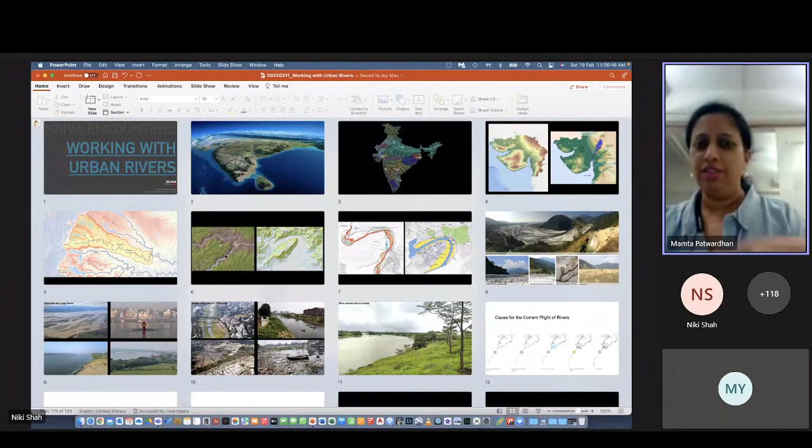Good morning, guys, I think you already know me now. Brief introduction, I'm Niki. What I'm going to do is talk about our experience working with rivers in the city areas primarily. So that's why my title is Working with Urban Rivers.

I'll go through a series of subjects we encounter and how we tackle them. So it's a presentation not for a particular project, it's taking examples from various actual projects, some built, some underway, to think and talk about what goes into such work. What goes into it as a planner, as an urban designer, as a landscape architect, what we are supposed to do for such interventions. So let me start.

This is something which I love. I just want to share this picture, it's now easily doable through various software. This is India, and as you can see, India has many hills and mountains throughout the country. Why this particular slide? The rivers originate from the mountains primarily, and this series of networks of hills and the undulation on the contours results in an extensive network of large and small rivers throughout the country.

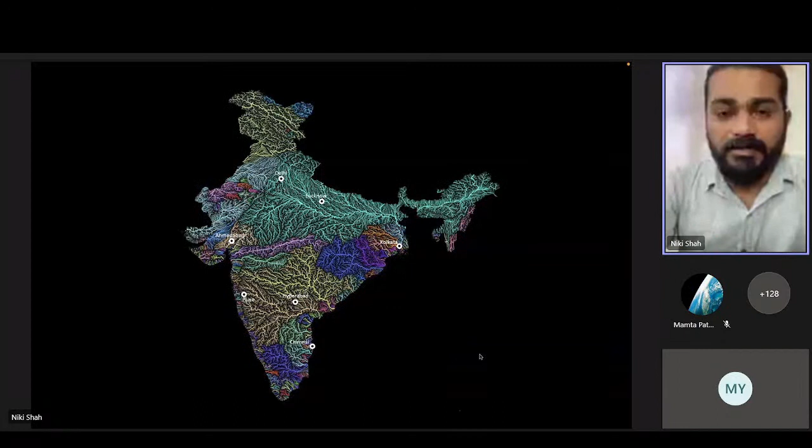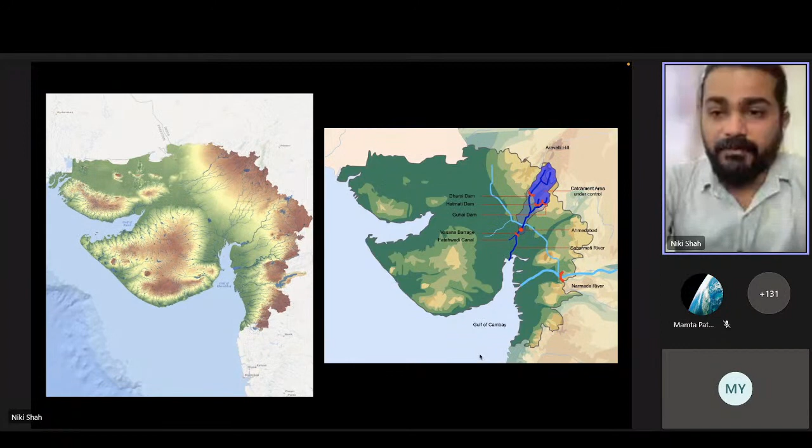When you work on a particular subject, I think from the larger context to the smallest context there has to be some understanding. So when we think about any particular subject, or in this case a river, we go and understand and study what the topography is, how the river is functional, where it originates, where it merges with the sea, and what other factors and features of the river ultimately cater to the overall existence of the river in a particular area, town, or region.

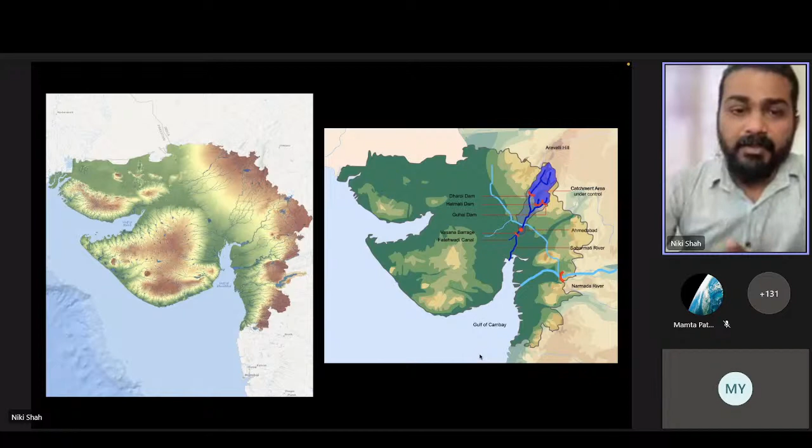So the study of extensive topography and the natural setup is the utmost and the first most important element, an aspect which is important for us to get in our understanding.

We also go and check the historical pattern of the river. On the right side, this is actually adjacent to India, it's not India, it's Bhutan. It's a river originating from the mountains, the Himalayas, starting as a very hilly mountain river, and goes through a plateau to the Brahmaputra. It has its own unique features and a continuously shifting river course in this particular area.

So dealing with this magnitude of water and the river pattern is absolutely important, that we make sure we don't neglect that for anything we want to do further. Also, if you see this, because of this sharp turn, there's a lot of erosion happening in the region. This is also one of the matters which needs to be dealt with.

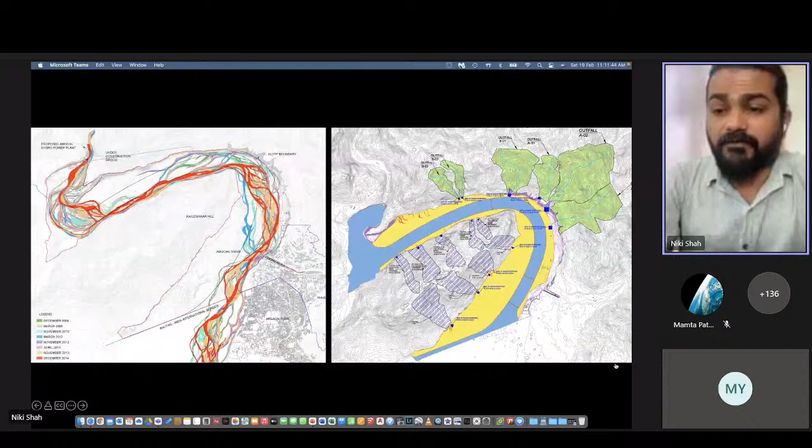So this is the kind of quick context of what it looks like. In the Indian context, there are large and important rivers like Ganga, Narmada, Brahmaputra, and these exist and are part of our lives for many reasons - a source of water, a holy river, holiness of the river water, religious activities, ghats - all of them are important and strategically located along the large scale river.

But there are rivers in the country which are pristine. They go through beautiful landscapes, hills and forest areas, and relatively they are untouched. But as you can see in the horizon, the town is extending, so there might be a threat to such rivers.

So when we think about any such interventions on a large scale, of course there are issues and problems we need to solve, but there are preemptive measures one has to take to make sure we don't damage the river the way we have done in the past. So these are the pre-thoughts of any such work we encounter.

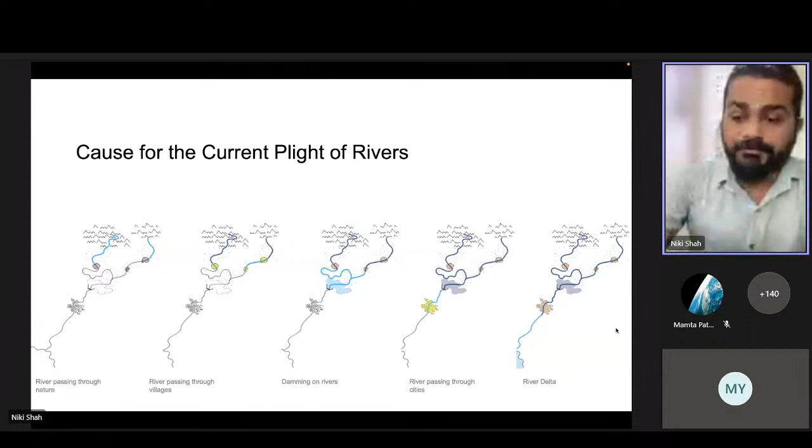Planning and design interventions in relation with rivers provide a unique confluence of urbanization and ecology that demands specific responses to the context. Riverfront or river rejuvenation interventions are ideal examples to understand ecologically sensitive urban design.

I'm going to restrict myself to talking about the river and city context. I'm not going to talk about rivers in forest areas because that has a different way of looking at it. So my examples revolve around cities and rivers - that's why it's an urban river context. Please keep that in mind.

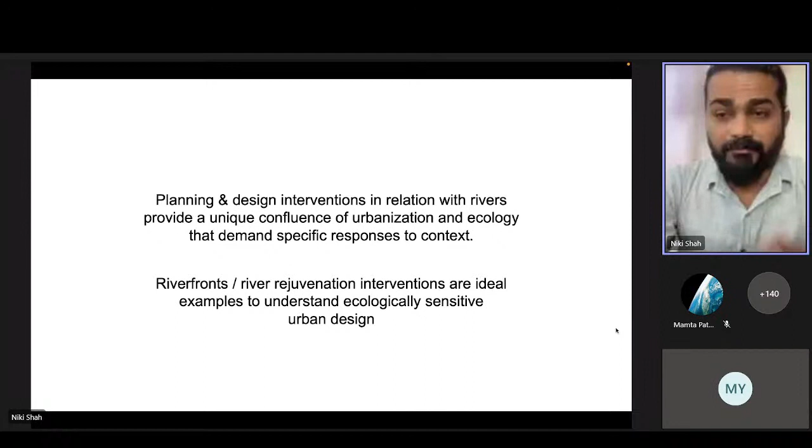So as an urbanist, it is important to understand various complexities involved in dealing with such interventions and making sure to address each issue and problem categorically to achieve a holistic solution.

Usually in the Indian setup, we tend to solve immediate problems. We don't think about the larger issues. We don't think about trade-offs. We only worry about one part of the issue and try to solve it. But if the other points are not addressed, the larger goal of any protection or such intervention doesn't get fruitful.

So those things are important, that we think of it in totality. So yes, of course, when the rivers are in their original situation, it is pristine, going through the forest, and it's beautiful. At one point it's dammed, so it's protected also.

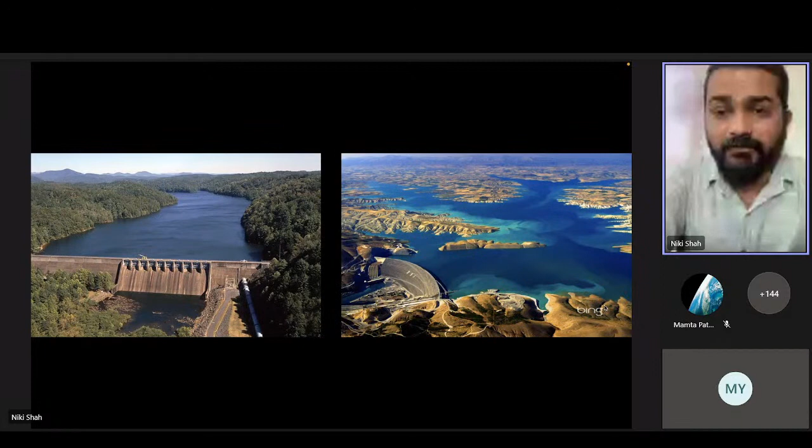But when it also passes through beautiful towns - this is not an Indian context, but is an example - there are many towns in India situated in mountain ranges, which have good quality water and river. Eventually, when it comes down to the industrial area or any such urban area, it tends to get polluted because we haven't solved the city problem and we tend to rely on the river to take care of our urbanization of the cities.

And eventually we pollute the river. And that's the condition of most smaller nalas to the rivers in the city. This is an example in Ahmedabad - this is 20 years ago, and that's the condition of the river at that time.

When we think about a river as a project, the quality of water and pollution is one issue. Urbanization is a second threat. There are people living on the river because that's easily available land, and it's a subject we need to tackle sensitively. Sometimes there are markets and other economic activity on the river, again because the land is free.

In the case of Ahmedabad, the river is not a perennial river, so it's dry most of the time. Only flood water or release water comes from the dam. So most of the year it was an empty riverbed, and that's why the land is easily accessible, and people have started using it for multiple purposes.

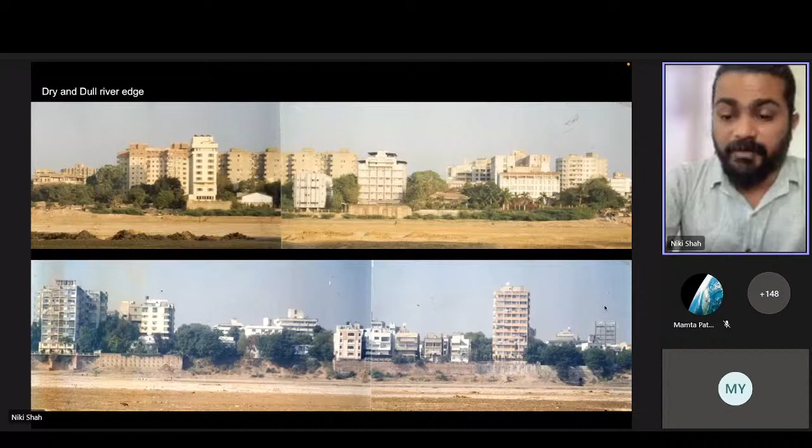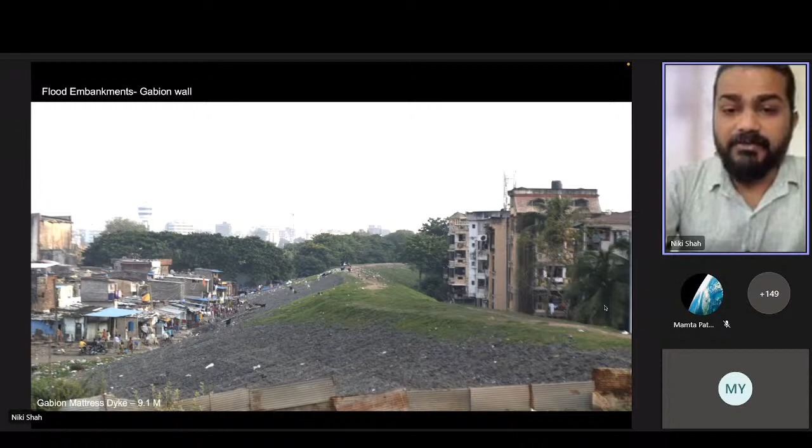Bits and pieces - sometimes cities have taken measures to protect the city from floods. Flood is a threat to many such rivers in cities. This is an example of Surat, Tapi, where the city has built dikes from stone, which protects the city, but it's not comprehensive. So the solution is not there yet.

The problem is not solved - it has a lot of pollution. Because of the pollution, there is eutrophication in the river, which is a nuisance. It creates problems in the river and many adverse effects as well.

There are rivers in the country which are living rivers - there are animals, crocodiles, fishes and everything. This is the case of Vadodara, where the crocodile habitat is flourishing in the river. So one has to also think about how to address safety and protect the living species in the river.

But in counter, it's a threat to human beings also, because the crocodiles tend to go into the city area during floods and actually harm people. So we need to understand how to think about both aspects.

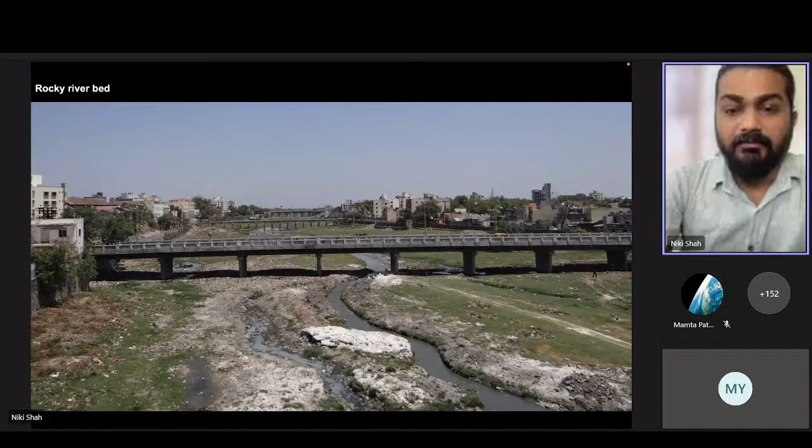Then there are absolutely dry and rocky riverbeds where water is really not there, in a drier region. So how do you manage that? How do you revive such rivers? I'm showing you examples and photos from the various cities we have worked with.

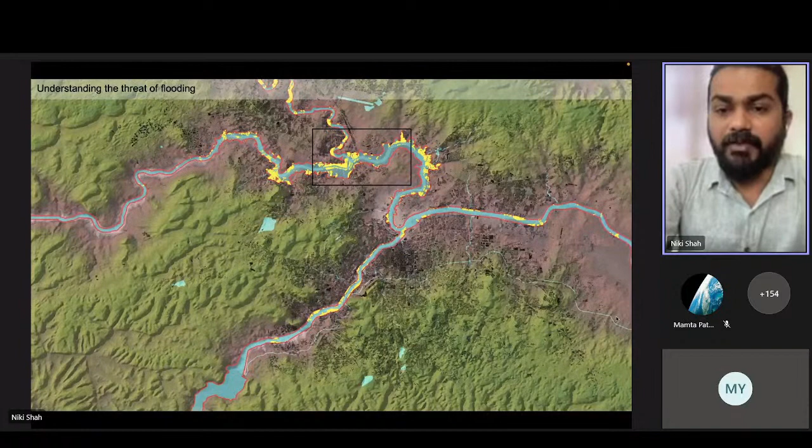There is a huge threat of flood in the monsoon flow. This is the case of Pune, Mula-Mutha River - if you know, I've been there. Most of the area next to the river gets submerged during the flood, and it's also an issue with poor urban design or city planning, and how you integrate all these issues together. In the case of Pune, urbanization has already taken place.

When the flood comes - these are the official irrigation department maps you can see - the flood actually damages or inundates the area around it. So how do you manage this also?

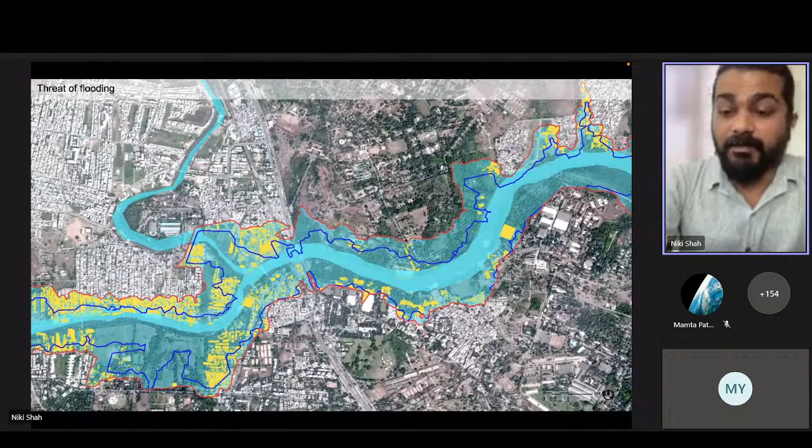These are the associated issues with urban rivers which need to be taken care of. Otherwise, we won't be able to revive the river, because we are always stuck with this particular subject: how do you protect the city from the flood?

In typical situations like this, although you might have done something, during flash floods or abrupt monsoons the city always gets flooded. In the case of Pune, Baroda, Tapi, and Ahmedabad, this was the every-year scenario, and the city has to face a lot of loss - sometimes lives, and damage to urban infrastructure. So how do you think about and manage this comprehensively?

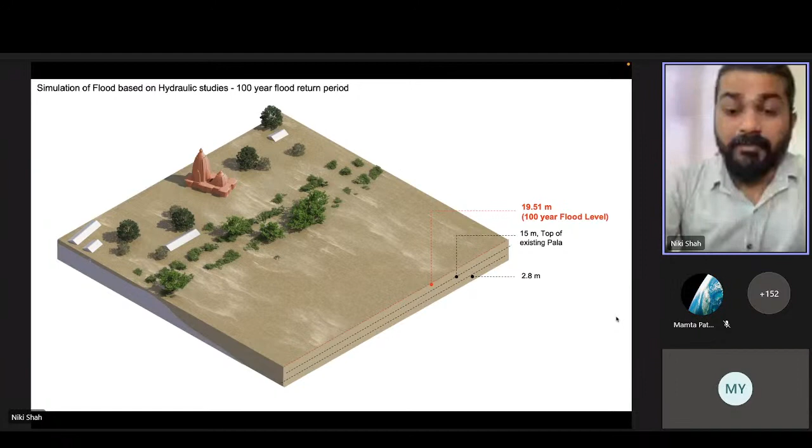And of course, there are rivers which are pristine - the landscape is beautiful. So how do you make sure future urbanization doesn't spoil this river, as we have faced in other projects and other cities? There has to be a plan to safeguard such areas from future urbanization.

Instead of corrective measures, I think it has to be a preemptive measure where we can protect the river and the river edges from the beginning, and plan the area or city in a way that it doesn't cause damage the way it does in the current context. That's something we have also addressed in some of the projects we have worked with.

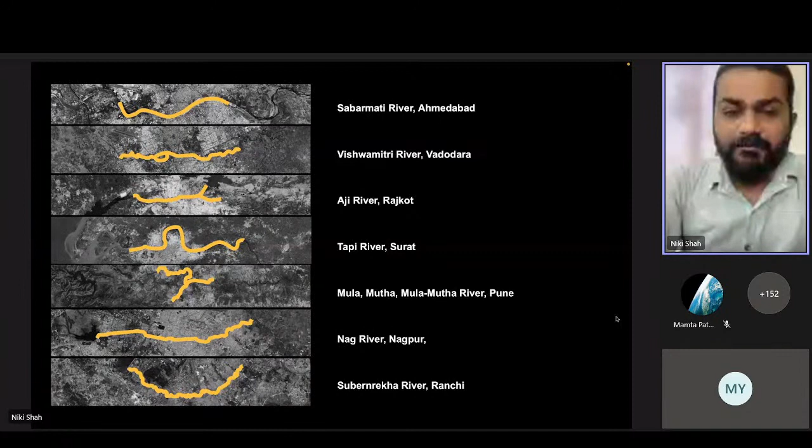So this is an example, or the experience from various cities and the rivers we have worked along. If you put together and try to summarize the key factors, these are the issues which every river faces in the city.

One big thing is pollution. A lot of sewerage water or industrial waste gets put into the river.

Risk of flooding. Most rivers have the flood issue because of heavy monsoon or the release of water from the dam, so the city gets flooded. So what do you do with that? Sometimes the water is scarce, depending on the region. So how do you manage and revive the river in a case of scarcity?

Sometimes the city does intervene in development to try to protect or work on the river edge or riverfront projects, but they're unplanned. They're not comprehensively planned. There are piecemeal developments which lead to further damage to the river, and negligence towards ecology and biodiversity due to urbanization.

A disjointed river edge ultimately creates a not-so-harmonious edge with the landscape, even in terms of public access. And it ultimately leads to inaccessibility to the river.

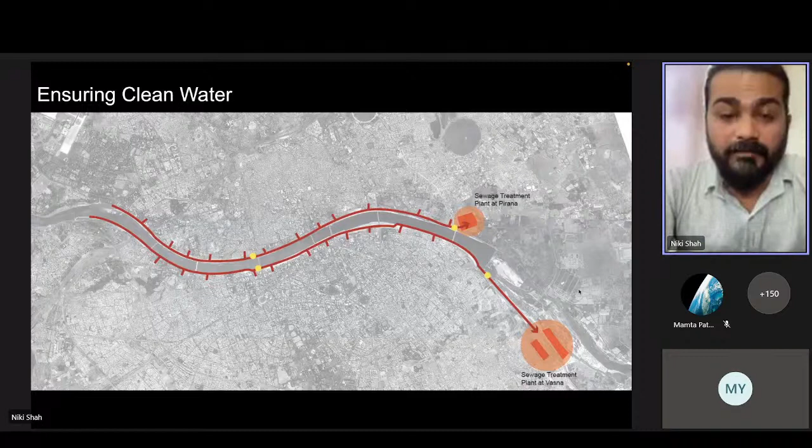We had to make sure that the polluted water, the sewage water, doesn't go into the river, and it diverts into a treatment plant instead. Eventually, the treatment plant water can even be used to refill the river. And after many years of work, the river has become relatively cleaner.

And it's a continuous process. So we are still working - the city is still working on and refining this process, making sure the river gets cleaner day by day.

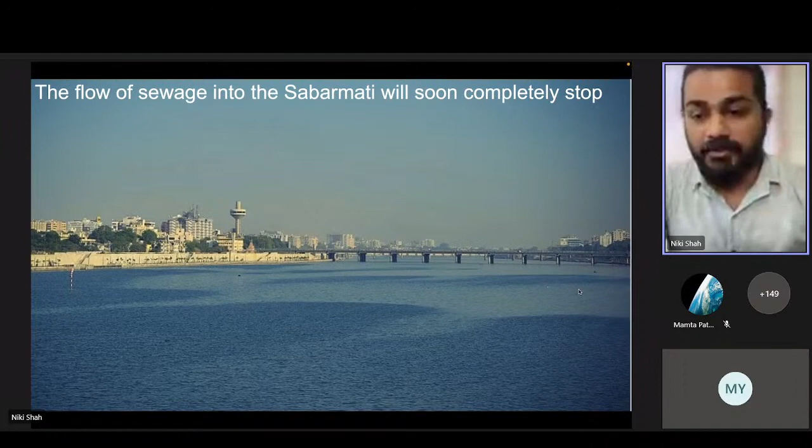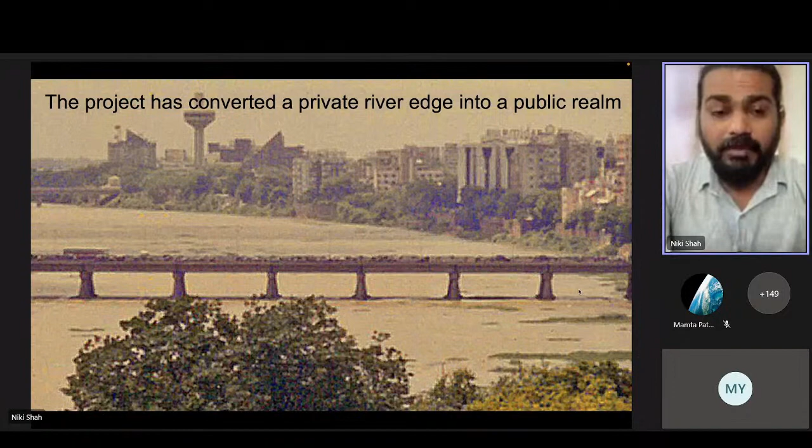The flood, which you see in this case in Ahmedabad, it goes all the way to the property and sometimes more. So it damages the infrastructure, damages the neighborhoods also. And eventually you want to protect them by some sort of embankment.

This is the solution worked for Ahmedabad, but in different projects and contexts, we have come up with a different, more sensitive approach to embankment designs. A flood will be protected by doing an embankment, which will also double as an accessible public space, so people can actually walk on it, not just an engineering solution. That's a quick understanding of how you do that. Eventually, it will protect the city from the flood.

Now this flood aspect is also highly technical. It's not just random calculations or random decisions. A lot of technical studies need to be done - hydrology, hydraulics. There are irrigation departments, there is a Central Water Commission who work and think about all of this and come up with the right solution for each river. So we have to go through those processes and technical studies before we come up and propose any such intervention.

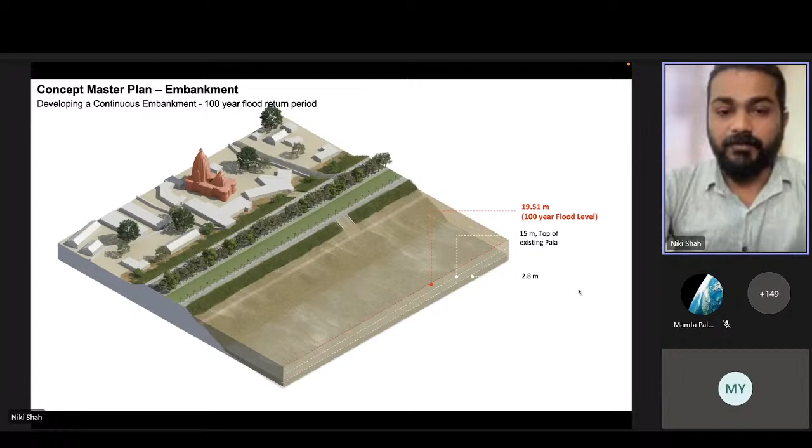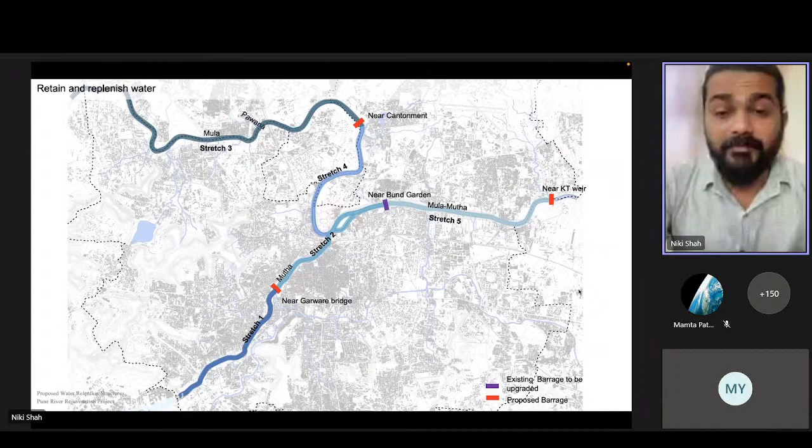Eventually, the idea is to revive the river and make it more of a front to public lives rather than a back of the city. It needs water, it has to be accessible. So treating the water, retaining the water, and eventually using the treated water becomes an absolute necessity - that's one of the solutions. It has to be accessible, and you need to plan it comprehensively so people can actually access these areas without creating crowds at one particular location, distributing it across the length of the river.

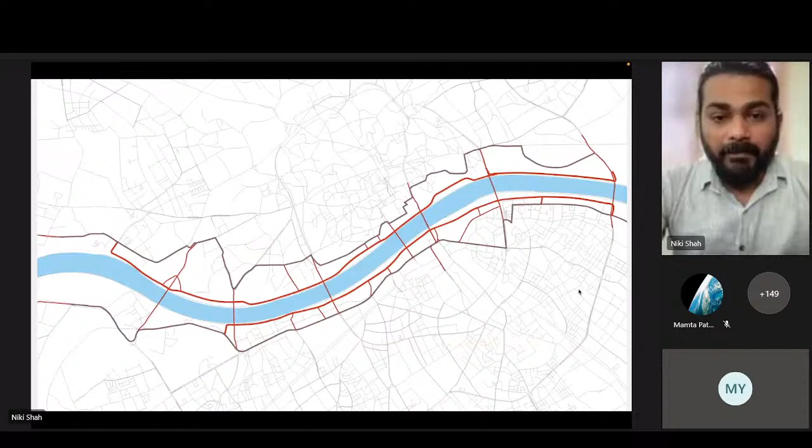So this is in the case of Ahmedabad. The river is accessible now. Earlier it was not.

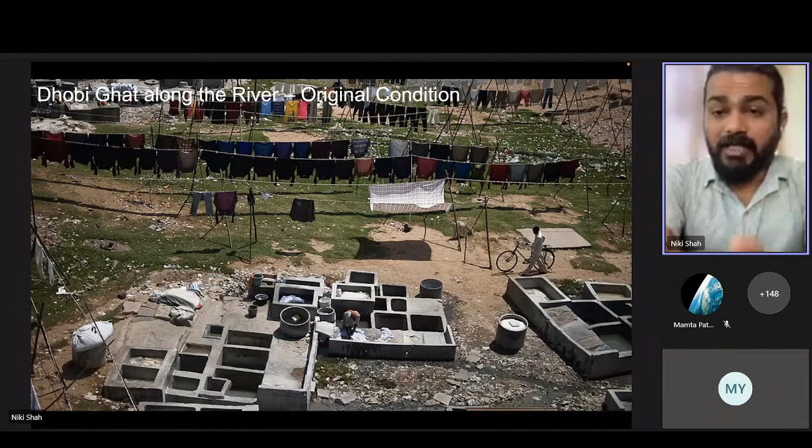We also need to make sure that any social or economic activity which happens on the river - and this is not organized, it has come up as the city has grown - as part of the project, we need to integrate these facilities and give them better conditions. There are two issues: we make sure we give them the right to use the space so we don't hamper their livelihoods, but because of this activity and the chemicals they use, they actually pollute the river. So it's a win-win situation - they get a good facility and the river is protected from the harmful chemicals used for such activity.

So in the Ahmedabad case, we actually designed a separate campus along the river called the Laundry Campus - a Dhobi Ghat - with all the modern facilities needed, accommodating all the people who used to work on the river banks. The water and everything ultimately goes into the treatment plant, not into the river. So from larger interventions to small bits and pieces solutions like this, together it helps the success of any such river rejuvenation project.

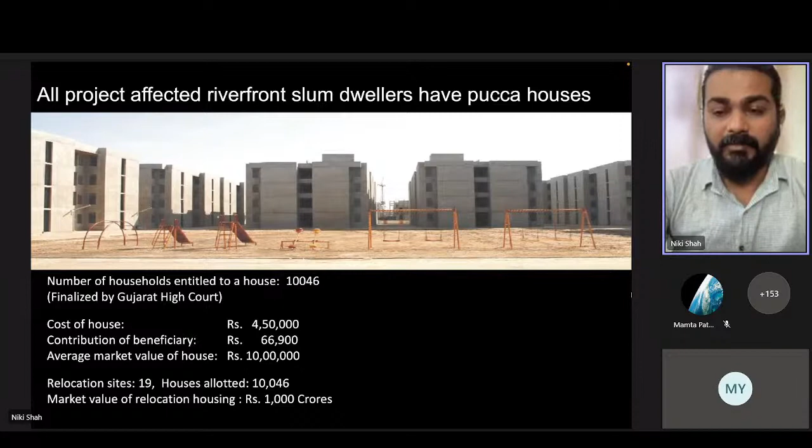Slums, yes, the slums are on the riverbank. There is no other land available, so they definitely use this space. But every year there is a flood and their houses get damaged, so it's also a concern for their safety. At one point, the city has to decide there has to be organized housing for them, not leaving them open-ended in such threatening areas. So in Ahmedabad's case, the housing was developed, and the market - any local economic activity - needed to be organized, so we've done that for Ahmedabad in this case.

So these are quick glimpses of how you tackle the varieties of subjects, and it depends on the city and the context. There are different types of issues and cases, but in a larger sense, the 7 points are the key factors which have always come across as something to work on.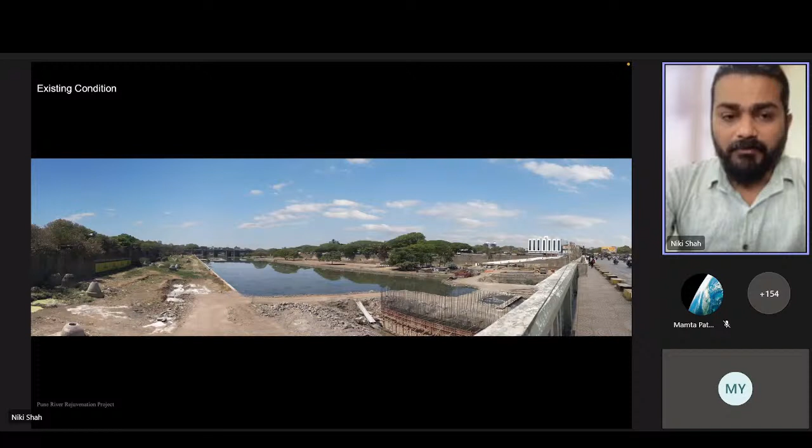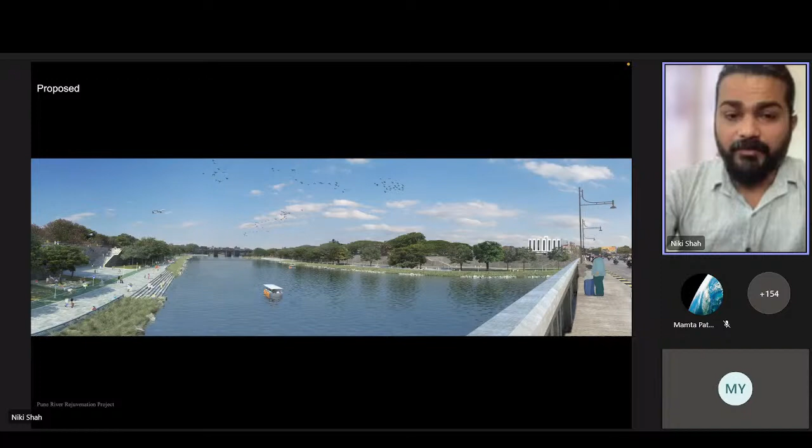So I'm going to talk further on this aspect. Sometimes in a situation like this - half-hearted development - the kind of solution we can give is shown here in the case of the Mula Mutha River, where the embankment strategy and landscape show how the water is going to be replenished eventually.

In situations like this, there are temples and ghats, and trunk lines already laid along the river. How do you make sure this situation is improved - the polluted water, the infrastructure lines, the temple getting access - and transform it into integrated development with ghats, putting the lines underground, and those kinds of things.

In a situation like this where the river is living, like with crocodiles, you can actually design the habitat within the river, which helps crocodiles flourish while also protecting the city and people so they don't face flood situations that harm them in the city area. So that kind of solution.

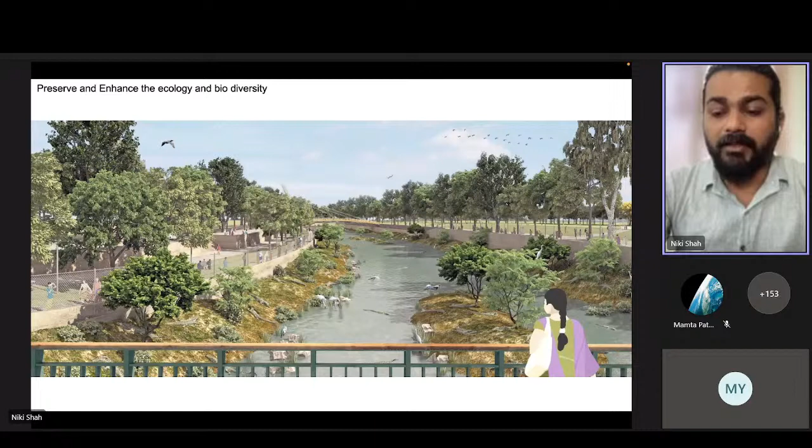Every time we work on something, there are unique characteristics to the particular river and context. Looking at that aspect, we need to accommodate and make sure we avoid a unilateral decision-making process for any such master plans or design.

After doing all of this, in situations where the river is already polluted, there are standard solutions which I've explained. But there are rivers like this that are pristine, green, and landscaped.

So how do you tackle such a case if this is part of the project, let's say there are 20 kilometers of river length, and only a small portion of the river edge is urbanized, the rest of the river is like this. But there is a plan to expand, the city is going to grow, and as you can see on the horizon, the city is already expanding along the river. So how do you make sure these rivers are protected as part of the overall plan, rather than doing the same process?

Let's get the problem first and then try to solve it. How can we integrate this riverfront project or river rejuvenation project as a larger city master plan? That's something I want to elaborate on further.

I'm quickly showing an example which we are recently working on in Pune. This is a river called Indrayani, around 20 kilometers long in total length.

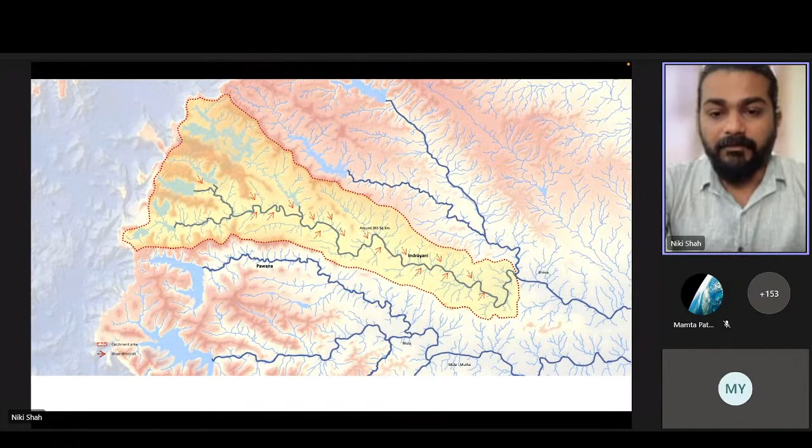This is a quick contextual picture. So there are flatlands and smaller hills around. There are also urbanized areas and large facilities, and campuses have come up along the river.

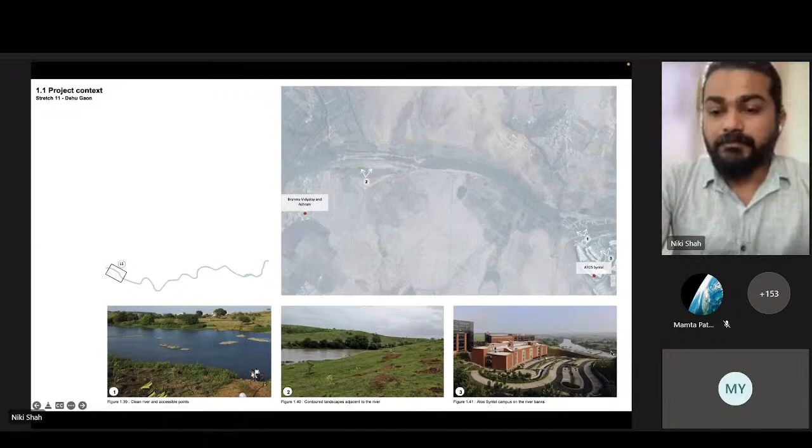There are temples, ghats, crematoriums. But you can see in the satellite image the city has not yet reached all the way to the river. You can see small settlements and urbanization, and here the societies have come up.

So when we look at the pattern of such urbanization, in the coming 5 years the entire region will be urbanized. As transportation lines and infrastructure get built, the city will expand, and we will have the same issue with the river that we see in other urban areas.

So our approach is to plan this river rejuvenation project in a way that protects the river from the beginning, with the city having a particular limit where it can expand without damaging the river edge.

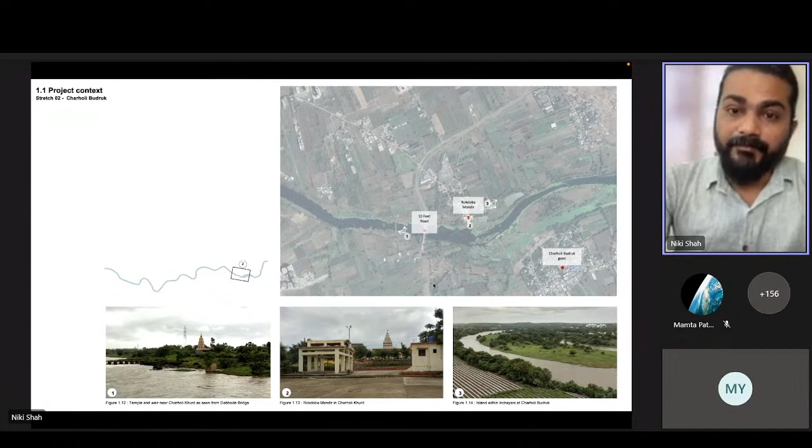There are different activities. There are important temples and ghats where a lot of tourists and devotees come every day and throughout the year, and these have a direct relation with the river water.

We also go and think about the different activities and the current pattern of development, and try to map them along the total length. Most of the area is open land, forested or agricultural land. There are smaller points, smaller interactive areas where the city has come all the way to the river, or some religious or industrial activities.

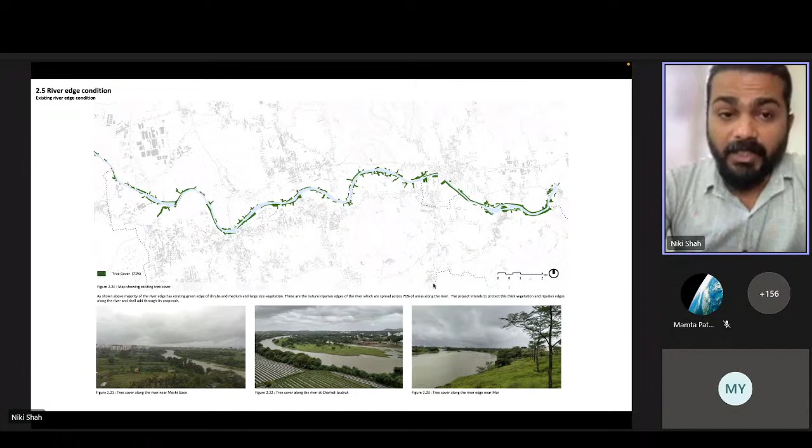Keeping this in mind, how do you approach such a river? We study extensively the current edge of the river in terms of vegetation and trees, so it's important to understand the local flora and fauna, which helps us decide how to actually make this edge more of a landscape edge.

We also study the immediate land use and current situation. As you can see, most of the edge is green, meaning it's agricultural land. But the city is already expanding towards that, so this agricultural land will diminish at one point, and the city will reach the river's edge.

We also study in detail the hydrology and hydraulics. Every river in our country has a map showing the inundated area, with high flood lines and frequent flood lines. As you can see, most of the river flows in the center, but most of the immediate areas are floodable, so how do you manage that?

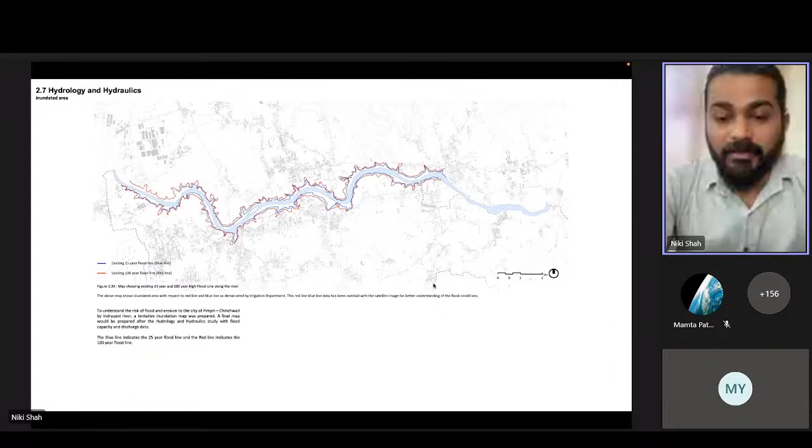And of course there are contrasts. As you can see, there is an active edge and a passive edge. So how do you make sure it protects the river and also brings it more into the daily lives of the people? There are limited points where people can actually access the river, but the rest of the time it is open land.

So the primary objective, keeping all other points in mind, is to make sure we protect the edge from further erosion. There is constant erosion of the land at the edges, so we need to make sure we protect the land.

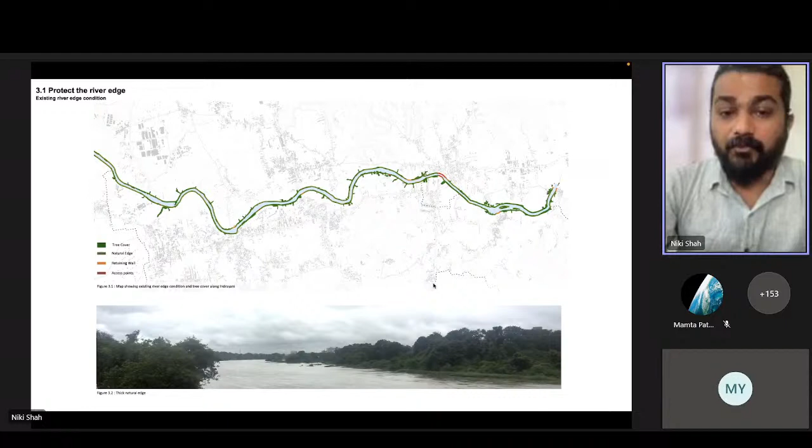In this case, we have tried to keep maximum, or 99%, as a natural edge, strengthening the edge to make sure it doesn't get damaged by future floods or frequent floods, and the vegetation everything grows. There is a limit for any city to grow, and there are various studies of the river edge and how the river is done.

There is land ownership to consider. Urban design and urban planning doesn't happen if you don't worry about who owns the land. We can intervene on public land, but we cannot do anything on private land. So it's absolutely important that we map all the land ownership along the river and understand the situation in the actual context versus the ownership point of view.

So these are the different factors we also tackle, even if the landscape project is there, but this is critical. In this case, you can see the red portions are the pinches where the river is actually quite narrow, where the maximum threats are.

So how do we make sure we also improve upon these aspects? Ultimately, we protect the river edge and have a laminar flow of the river, where based on the amount of water it's going to carry during the flood, there is enough width and depth available so the water can go and doesn't damage the rest of the area.

As you can see, our intervention is minimal in this case. We have tried to keep the lay of land and the contours similar, made it more strengthened, planted more, so it doesn't eventually damage the edge and can sustain a longer period of time, not getting damaged every year.

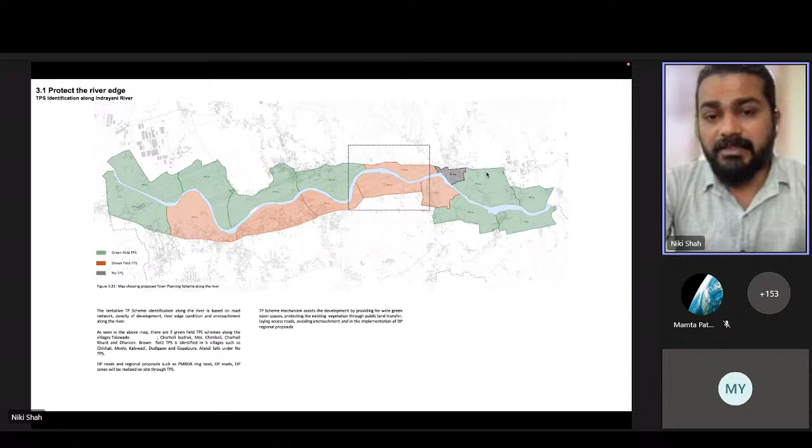So inundated areas are critical. How do you handle urbanization and future urban growth? These are the official maps of the city where you can see the city is already expanding all the way to the river. So eventually the planning angle comes into the picture apart from river rejuvenation—how do you plan the city in a way that you have enough land for the riverfront projects also.

As we go, it's a progressive protection plan or river rejuvenation plan where we protect the river. As the city expands, we try to expand and make sure we restrict the city to a certain level, and the embankment remains protected.

So here's a quick collage of the situation, this is what it looks like. The first intervention is to have a smaller weir in the river, replenish the water, retain the water, and give the edge as a protective measure through landscape.

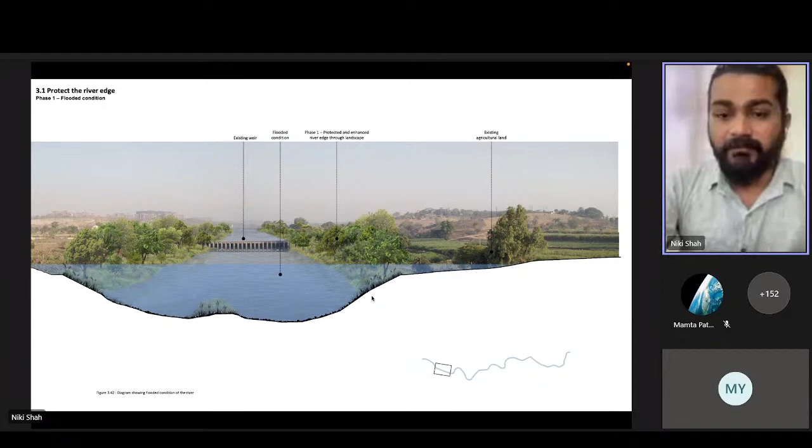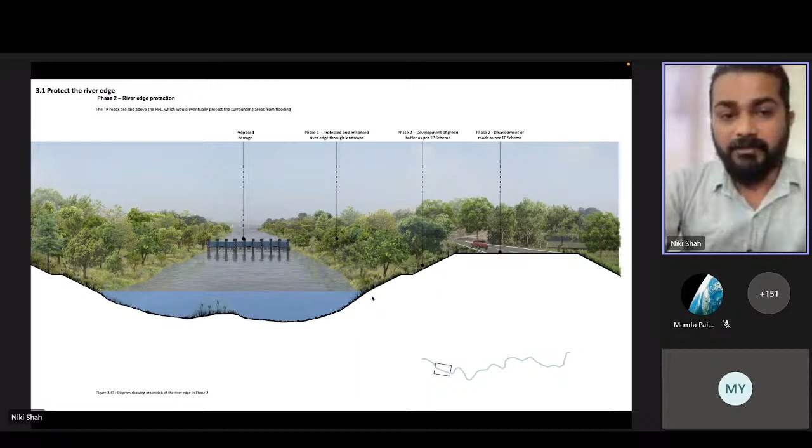In a flood situation, by the time the flood comes, it's still going to be flooded up to a certain level. Eventually, the city will have another level of embankments which protects it from the eventual flood. That's how this step-wise manner grows into the river project.

When we did the master plan for this area, this is a typical zone showing how the river is. The black line shows the land ownership, not the project boundary—that's river land. The rest is private.

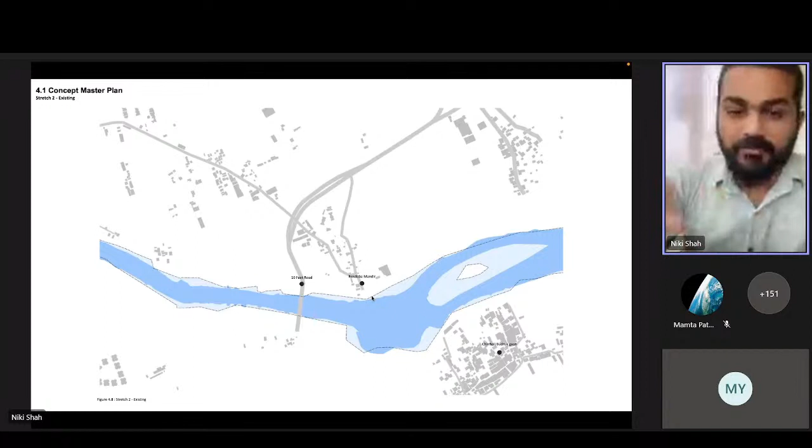We do the river edge and protection measures, creating the edges in a way that water flows smoothly rather than creating efflux or erosion, protecting the bank while keeping in mind all the existing activities like temples, ghats, access points, bridges, pedestrian bridges, and there is a plan for the future also.

This way, a couple of meters away from the river gets protected, and after that you have all the street networks and the future city—you can say TP schemes were planned locally. The plans were also designed keeping this in mind. So instead of solving the problem once it already exists, this is a preventive approach to safeguard this particular river.

And the city has accepted this proposal, that we will go in this fashion. So this whole buffer zone of the landscape or the river, the forested land between the river and the urban areas, is an important intervention.

So as you can see, a couple of other areas where the city is already flooded, and there are ghats and temples. How do you integrate that and keep the proposal for future expansions also?

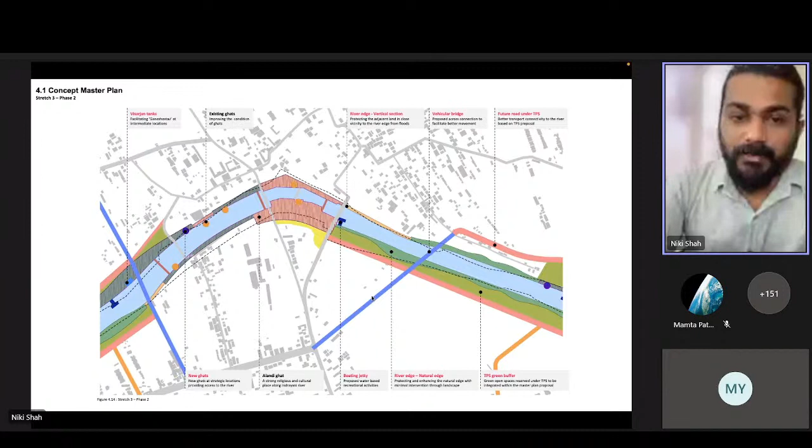So eventually we managed to put together a master plan, a landscape plan, which has lot of accessible edges and preserved edges. It's also an idea that not every time the river has to be accessible by people. It should be accessible, but not for daily life. It's not only always about recreational areas, parks and promenades. In this project we have tried to minimize that also.

The primary objective is to protect the edge. So there is forestation and protection. And then there are areas where people can actually go and walk and use this space also.

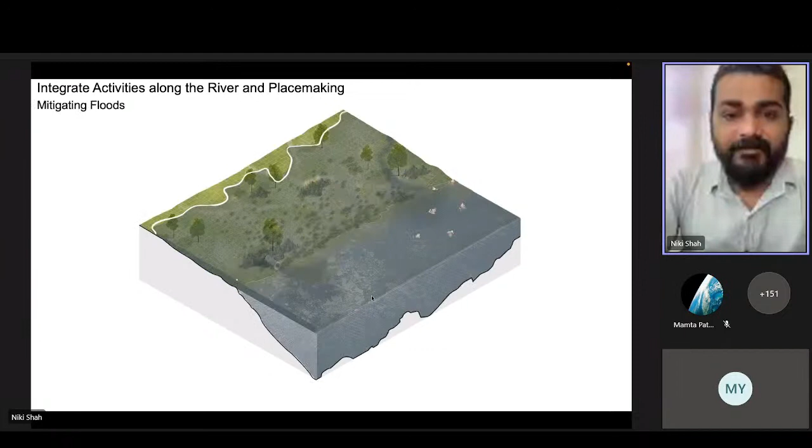So a quick diagrammatic summary. Typically, this is what the edge is: polluted water coming in, eroded banks, flood mitigation issues. These areas are always flooded, so how do you strengthen the edge and restrict the flood up to a certain limit?

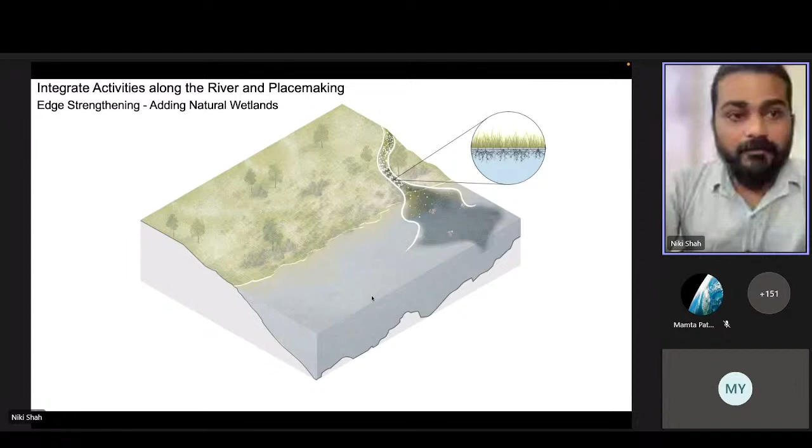There's a lot of sewerage and other things entering the river, which needs to be protected. Even in situations like this, there are so many inlets coming into the river bringing polluted water. These are actual examples of the location. So how do you integrate that as part of the river embankment strategy and protect the river from polluted water?

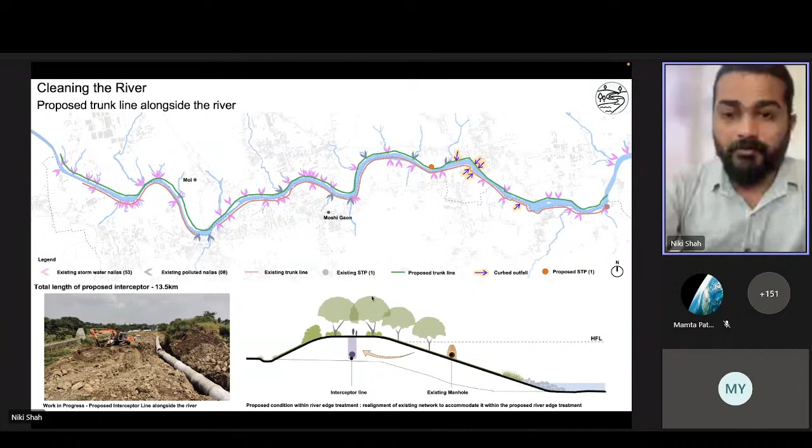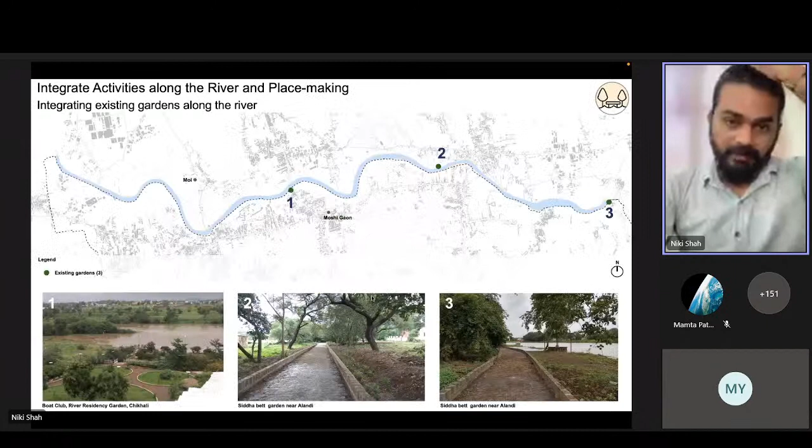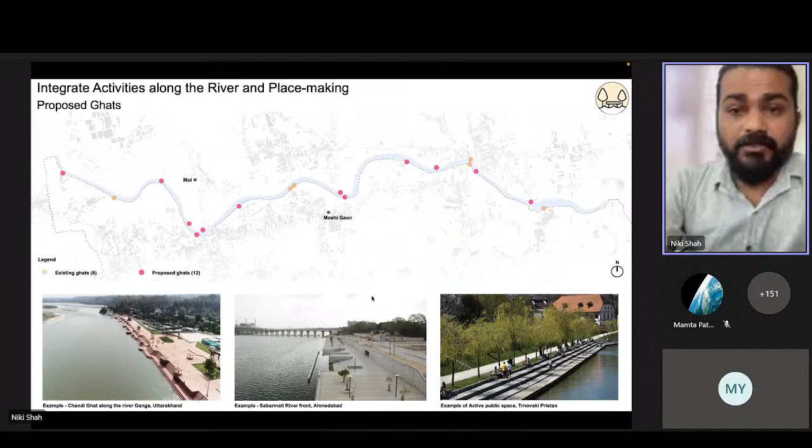As we are doing this, we make sure that some of the edges are accessible so people can actually enjoy the river and the public space.

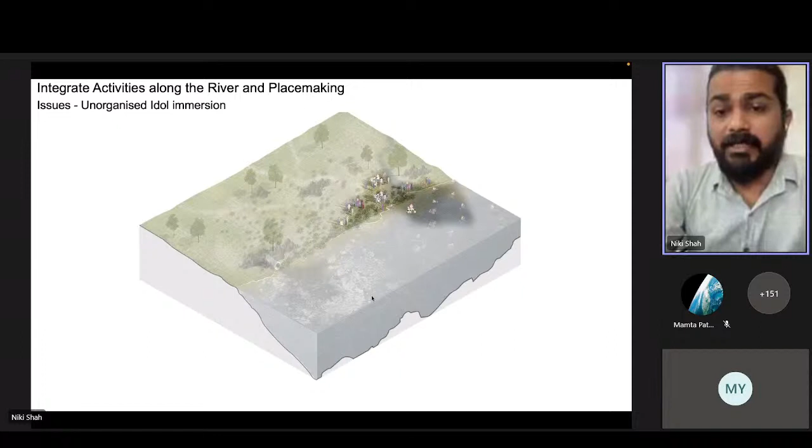There are activities like Ganesh Visarjan that happen on the river. So instead of putting idols in the river, many cities have already started creating independent ponds, something detached and delinked from the river, which ultimately doesn't pollute the river. These smaller interventions eventually help the larger objective.

So quickly, on the embankment strategy—this kind of landscape embankment protects the edges from heavy floods and other aspects, and for the longevity of such river strengthening, it also has to be structurally protected.

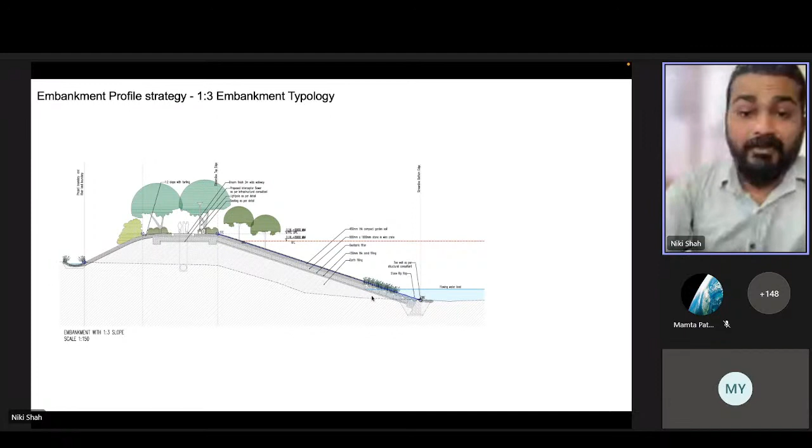So we have used stone landscape edges, tree plantations, integrated services, and various kinds of embankment strategies for that—trying to keep it as natural as possible while using multiple technologies, including structural solutions.

There's stone bedding, stone crate, boulders, and water-bound plantation species, which protect and keep the edges green and also help slow the water down at the edges. There are trees, and we make sure the landscape strategy and the overall technicality of the tree plantation get solved and integrated well, so the forest grows as the embankment is finished.

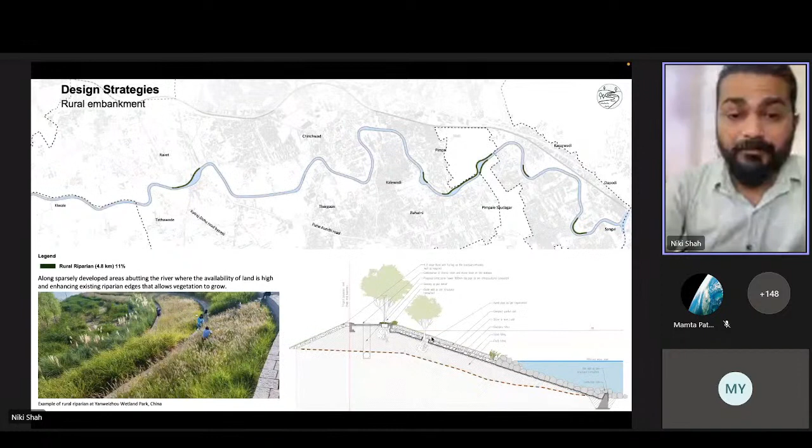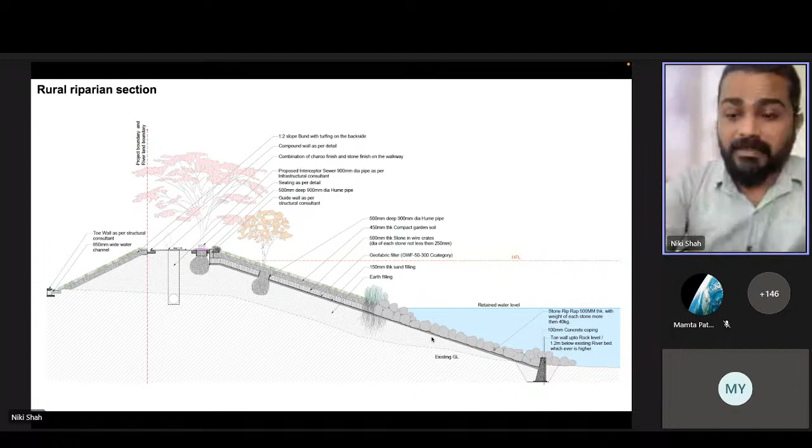Different kinds of embankment design have been explored throughout the length, and there are glimpses of that—using natural, local stone, river embankment, grassing of the edges, and tree plantation.

Depends on the availability of land, how much we can actually build. Sometimes we have to do a vertical embankment also, which is submerged so you won't actually see it. On top, what you see is the sloping landscape embankment. So there are various contextual solutions.

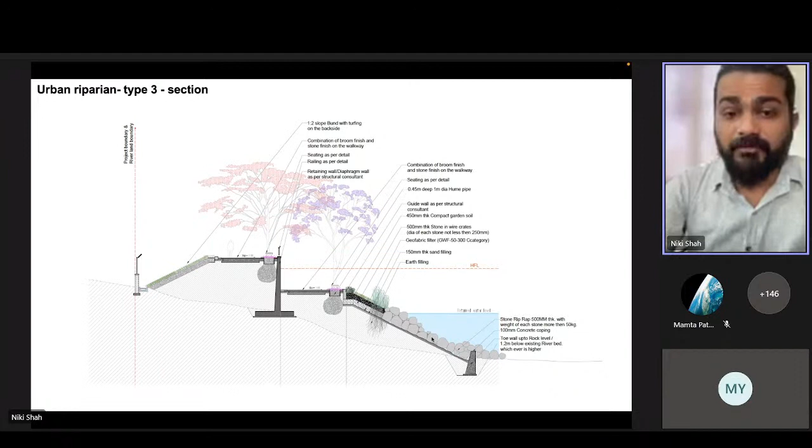This is actually from one project only, so there are many different articulations throughout the length, depending on the immediate context. Sometimes you don't have the land—here you can see a project where ownership ends here.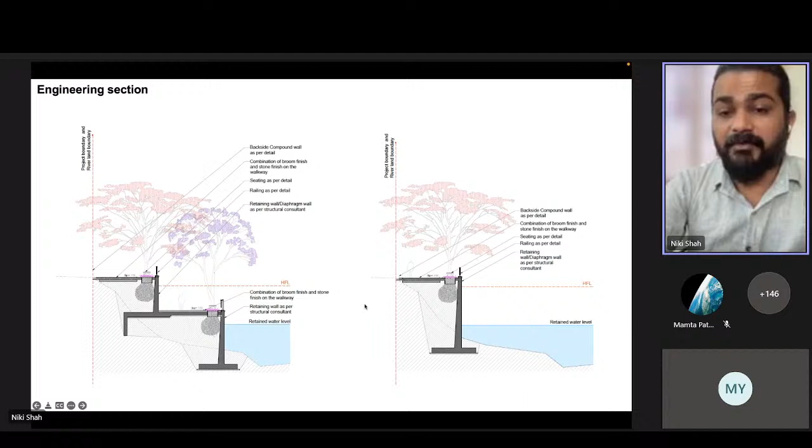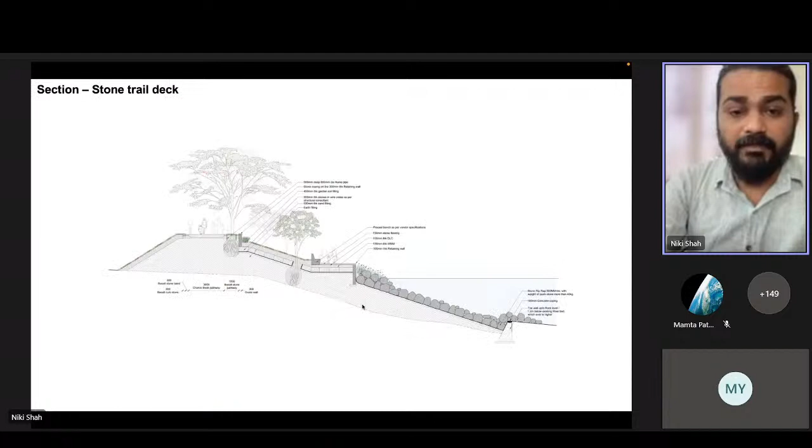So keeping the water as wide as possible, we have only kept just the river protection and quick access. And then, of course, because it's a public space, eventually at some locations we create walkways and sit-outs so people can enjoy this space.

So families can gather here in clusters and on decks like this. In this case, there's a walkway, tree plantation, deck, a sloping embankment, a stone protection edge of the riverbed, and the water.

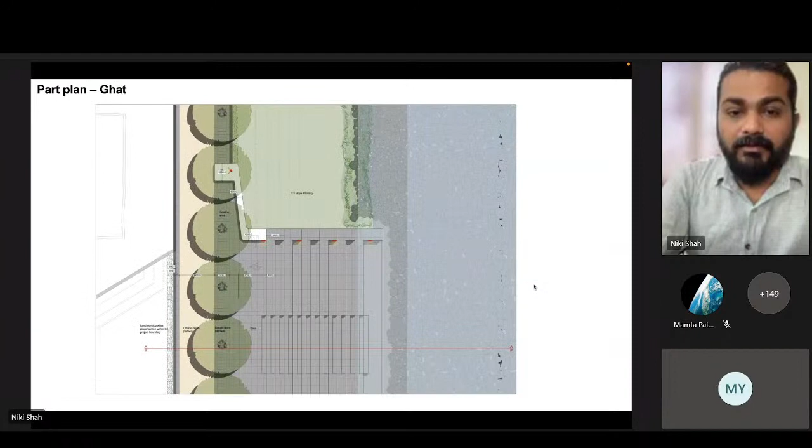Ghats, steps, access points to the river next to the temples and the other activities. So yeah, that's the kind of overall picture.

The point is that we tend to solve the problem once the problem is there, so we have worked with cities where the problem already existed and then tried to solve them. In case of Ahmedabad and many other areas, there are projects we are working on where the problem is not that severe, but because in coming years the problem is likely to expand, we have a preventive strategy for such projects or the river.

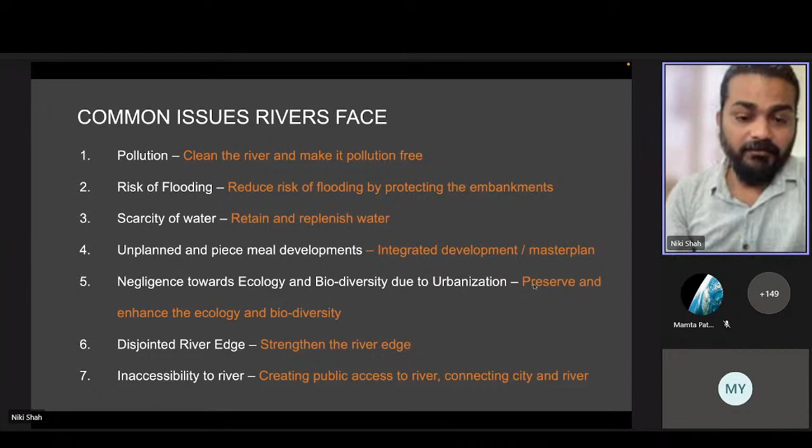And it's a complex task. It is not unilateral or one particular subject, but we have to think about, so we understand the geotechnical strata, we have a very deep understanding of the soil condition, the landscape assessment of the existing and the proposed river training and embankment works, environmental impact assessment, social impact assessment, infrastructure, finance - also an important factor when you pick up a project like this - overall development regulation, guideline for the landscape and the future.

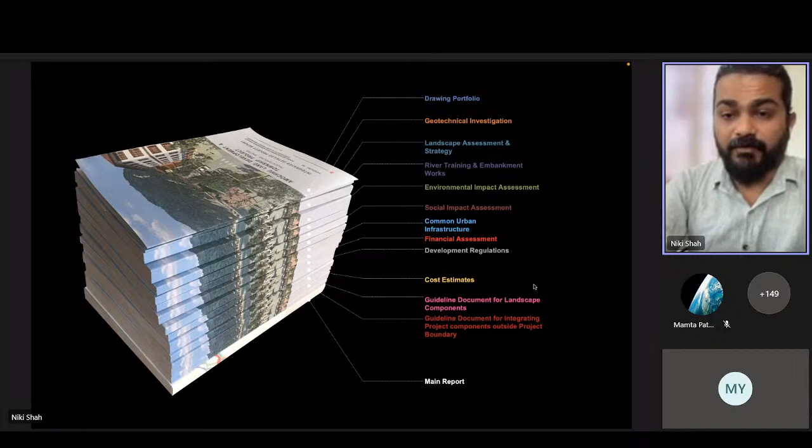So basically we do extensive study. In the case of the Bhutan Project, we have produced such written documents, which help the next step to do any physical intervention. And some of the glimpses of the area show what the transformation can look like. These are ongoing projects, and the work will start in coming months in this particular area.

This is in Pune. So you can see how the river is in the current situation. All the industrial waste is going into the river, this left corner, and how do you integrate them and have the strategic and the proper embankment.

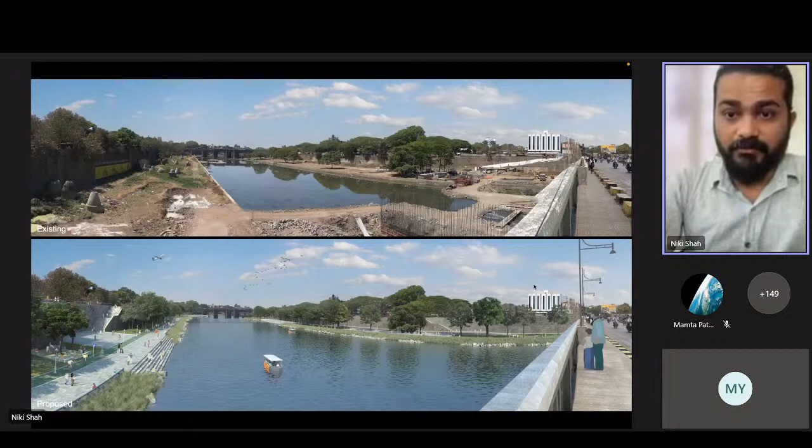Sometimes the city has actually narrowed down the river in the past, and we said that's not the right way of doing it. So you have to widen the river again and then make it accessible. This is in the center of the town. Also integrate the existing public parks as a part of the river, temples and the ghats, other religious activities like Visarjan, Ganesh Visarjan. So as a result, these are the proposal, and this is a real picture.

And I'm showing a couple of pictures from Ahmedabad because that has actually worked, keeping this in mind. So the picture shows on the left is 1980s, and the same photograph in 2018. How the city has transformed so far.

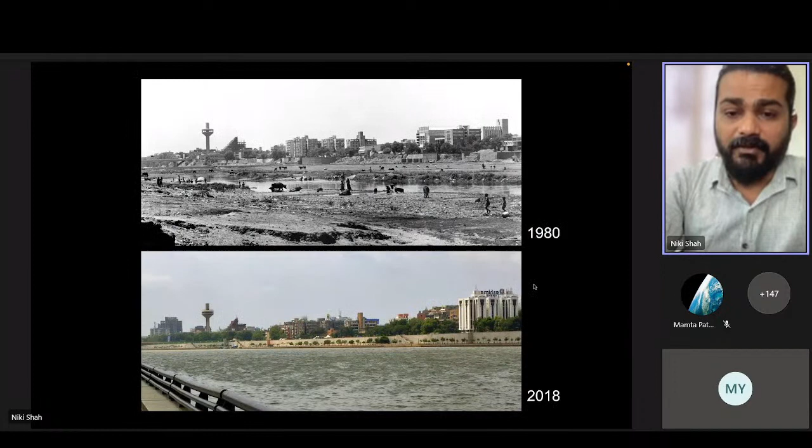Promenades now for people to enjoy. The water is relatively much cleaner. The infrastructure is being upgraded also as a part of the city development. And this has become a part of daily lives of Ahmedabadis in this case. So people use it every day.

So basically, that's what eventually happens. But this photo shows from Ahmedabad, so it doesn't mean that this is the only solution possible in the rest of the cities. So every time we pick up a project, there are different approaches and different solutions.

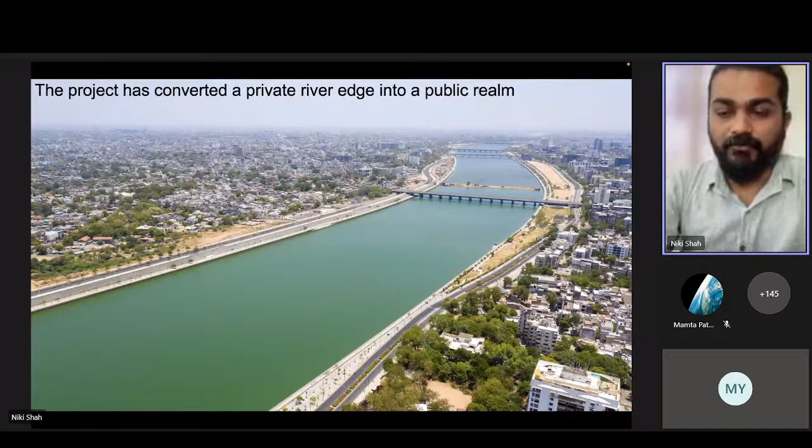So in the case of Pune, we have highly relied on the landscape strategy as a primary driven thing compared to other issues. In this case, the flood was the main problem in Ahmedabad. But it has eventually created a land with a lot of public spaces and projects, which helps the city to use it.

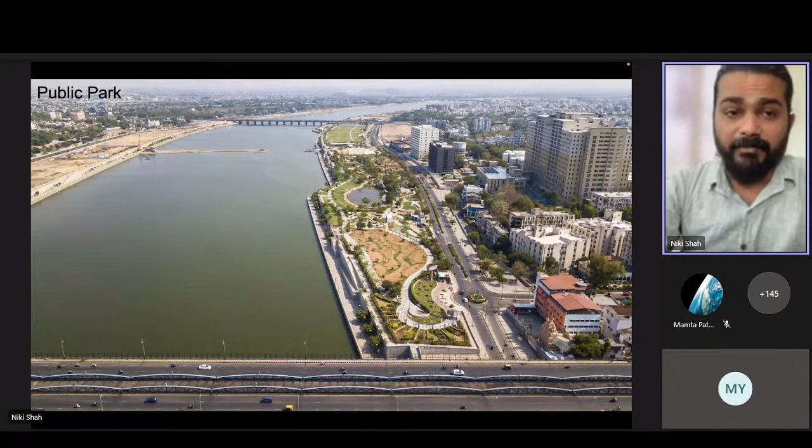In the Ahmedabad context, there was no public space in the beginning so far. But at least through this one project or one intervention, it has large public spaces which help citizens to use it daily.

And ultimately, it's all of this meant for people and the nature. So that's how the riverfront projects eventually turn into wherever it is. Yeah, that's it. Thank you.

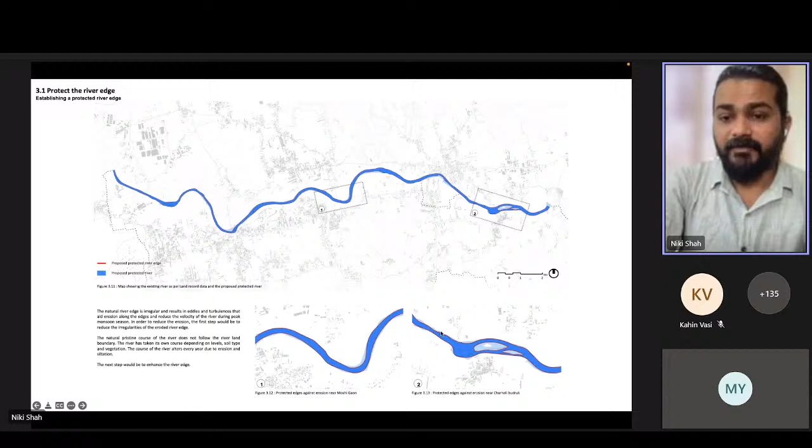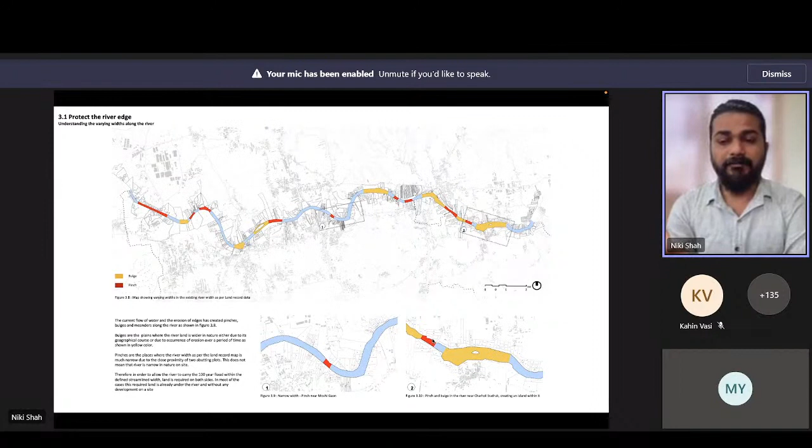When we do this, we have to tell them that this has to change. We come up with a strategy to minimize acquisition from private developers, since these are agricultural lands, not built houses, so it's easier for the city to ask for the land. The benefit to the individual owner is that there will be a river nearby, proper infrastructure around it, easier accessibility, and protection from floods. So the owner sees they're getting a benefit by giving away a fraction of land, 5-10%, making it a win-win situation.

With this project and any other project, we put together a plan showing how much land we need from the immediate context. Sometimes it's government land, sometimes cantonment or railway land, sometimes private land. The city opens a dialogue with individual owners, helping them understand the benefits of these changes in the master plan, and eventually it falls into place. It's a lengthy process—in Ahmedabad, we worked on this for almost 10 years, bit by bit, until everyone agreed.

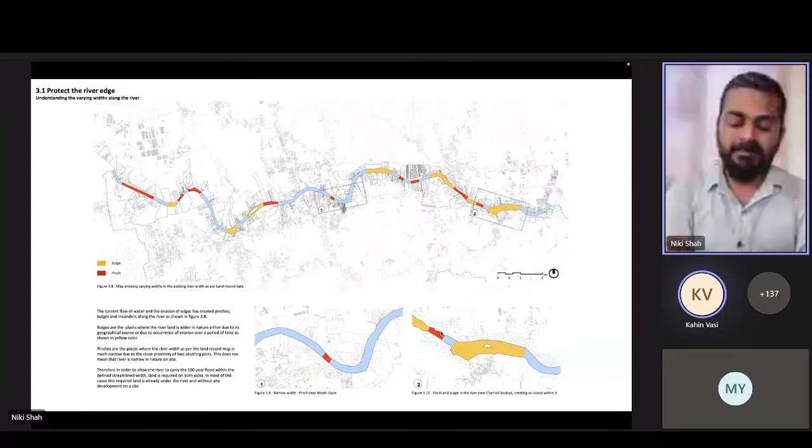Yeah, I can imagine, because it has to be a give and take—not everyone agrees right away. It's interesting because, as you showed with Sabarmati, it's not a process that happens overnight or is complete when the project is complete. It needs to continue happening one by one, like shutting down sewage channels. So, I think the students may have some questions—if so, put them in the chat box.

The other thing was quite interesting—how you considered all the activities taking place before, and rather than shutting down an economic or social activity, you looked at how to facilitate those activities in a more sustainable way.

That is something we understood from our team—planners and urbanists who've worked with the city for almost 50 years. It's not just about the river project; our experience is that in any urban planning project, if we don't incorporate all stakeholders and communicate and involve people, there's a high chance the project won't go beyond paper reports.

So when we approach such issues, we really think about what's necessary. There's no objective saying everything has to go, or that we only need a fancy riverfront project—it's not like that. As a process, we improvise as a city or master planner, along with the client.